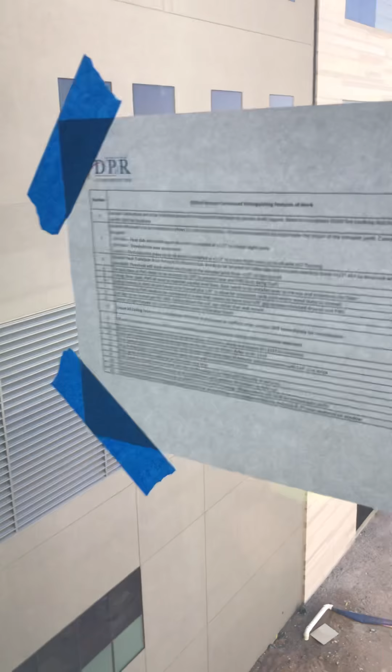Okay, so I'll zoom in on the checklist here real quick, my brother. So the checklist here corresponds to the visual here in order to align the subs on what the expectations are.

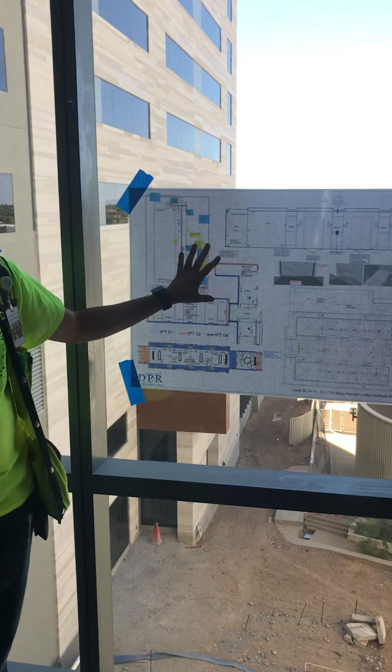And then at the kickoff meeting, before we install a single piece of work, we have a kickoff meeting with DPR and all the foremen that are responsible for that DFOW. They come through, they look at the checklist, they'll sign off saying that they acknowledge it and they understand it and that they're going to execute to these standards. And then these are kept here as a reference point for them to check back on throughout the progress of construction.

So let me see if I'm listening here. So this is what I'm hearing, is that we have to know what's important to the owner, number one, right? Number two, we have to know what we're building, so what's important to them, how is it supposed to be built, how do they want it to be built, how does the designer want it to be built? Absolutely. And then none of that's helpful unless the foreman and the workers know that, right?

Absolutely. So what you're saying is the acceptance criteria, that's basically the parameters or the expectations that you have to meet for them to accept the work. Yep. And that's what you go out and communicate.

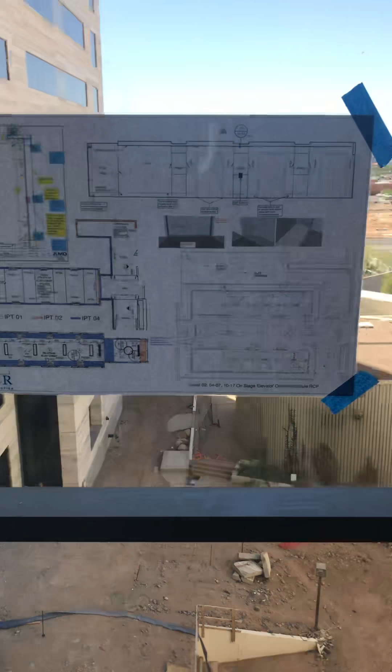And basically you're using these maps, so you have the checklist over there and then the map over here to communicate some of the things, like right here I see ceiling layout, right here I see joint layout. Basically using these maps to communicate, because if the workers don't know it, then it's not effective.

Right. Okay, keep going. Anything else? You about nailed it right there. So yeah, the biggest thing with the visuals is to have the one-stop shop for the guys to be able to communicate what that acceptance criteria was.

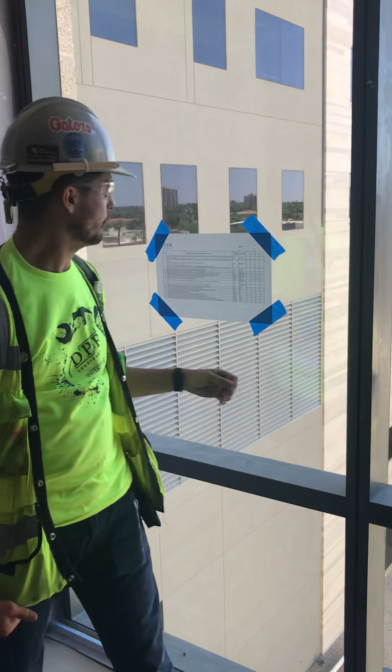On some of these you could see that we have it specifically as you need it within an 1/8 inch, or you need to have 1/4 inch zinc strips on your terrazzo or whatever it is. So it's just pulling that information from all over the place, from submittals, specs, drawings, getting that information in front of the owner and architect early enough that they can look at it and say, hey, do you like this?

Do you agree with it? Because this is what's bought out and this is what the drawings are going to drive us to expect. And do you also agree with that? And they'll say yes or no.

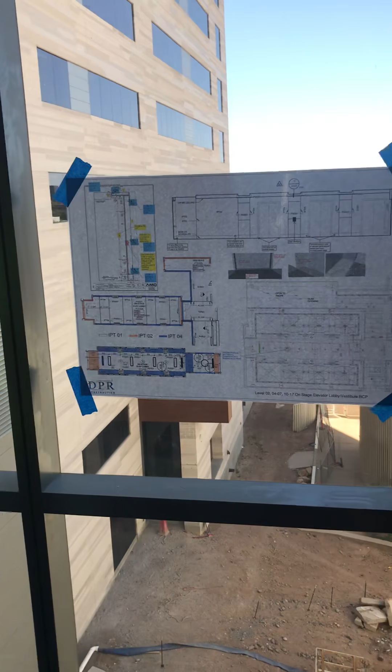And at that point, then we can control them a little bit of saying, hey, we can go above and beyond that, but we might need to talk about a change order or something like that, or a schedule impact. Because that's the standard right there. Because we set this standard, so it gives us better control to prevent the wish list type items during punch time.

Very good. To allow us to say, hey, we all agreed upon this. This is what we all put our thumbprints on that said we could do, and this is what we're building to. And you told me a story as we were walking up here about people doing huddles over here.

Can you mention that real quick? Yeah, so when we saw that this process was truly working and truly caught on with the craft, was without DPR facilitating. We just happened to walk past and there was a group of subcontractors here, and they were looking at the visuals and pointing and discussing and figuring out how things needed to go together. So to me, that was when you truly knew that this process has caught on with everyone out here and that it's actually a success.

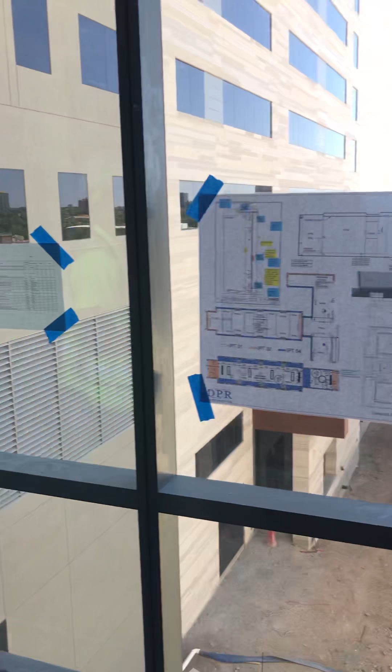Because if DPR has to be ramming this down people's throat, then it's no better than any other piece of paper that we could throw at them. But when it's just naturally happening and they're gravitating towards it, is when you know that it is actually making an impact on the guys out here.

Well, that's great. One quick thought: in some of my past projects, the architect would come out once something was installed and say, hey, that wasn't what I thought. Right now, not only do you have the meetings ahead of time, but they can walk around and say, yep, and if there's a problem, they can get it before we ever start construction.

Yep. Anything else, Mike? That's about it. All right.